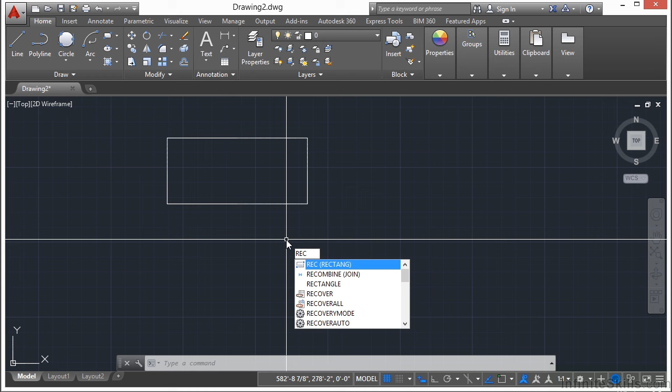You can just pick the command here out of the ribbon, or you can type in rectangle, or just REC, press return. You pick your first point, and then you pick your second point.

Now you can also define the lengths of the line to make it exact. You type it in similarly to drawing a line. So let's say I want it to be 24 inches, tab over, and then we'll make it 12 inches high. And there we go — we have drawn this rectangle at 2 feet wide and 1 foot tall.

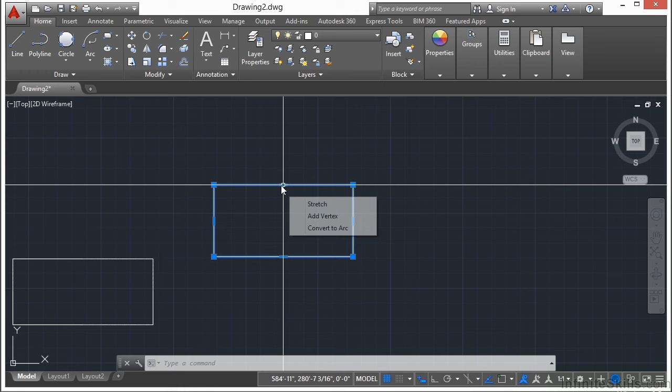And you can see when I select it, my grips tell me that this is also just a regular polyline. Now there are some other options for the rectangle. If you notice here, you have chamfer, elevation, fillet, thickness, and width.

To define the chamfer or fillet, you'll choose either the option C for chamfer or the option F for fillet, then you type in the value. So let's use a chamfer unit of 5 — we're going to type in C, press return, type in 5, and then 5 again because it gives it a bit of an angle.

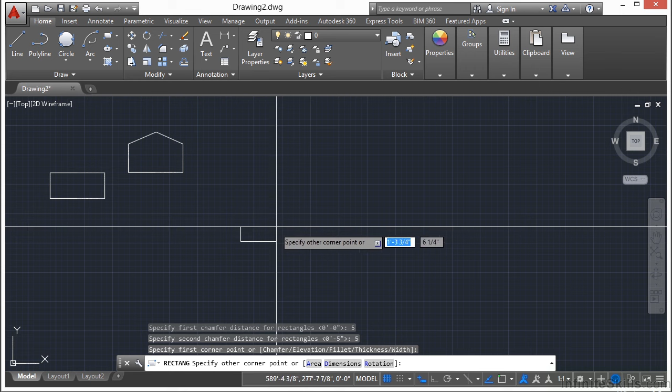So now I pick my first point, and it looks just like a regular rectangle until the box is big enough to have a 5-unit chamfer on the corners. That's a really cool trick.

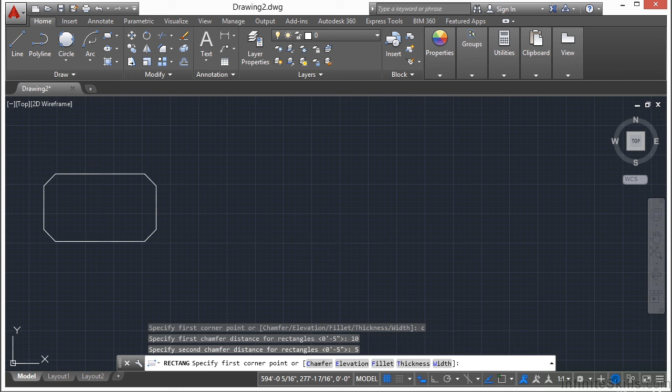So if I do this again and select C for chamfer, let's say I go 10 units and then 5 units on that chamfer. I pick my first point, and you can see I have a chamfer here, but it's a little bit different because one is at 10 units and one is at 5 — it goes down 10 and then 5. Keep in mind that first number you pick will go across and then up, and here it goes down and then across, etc.

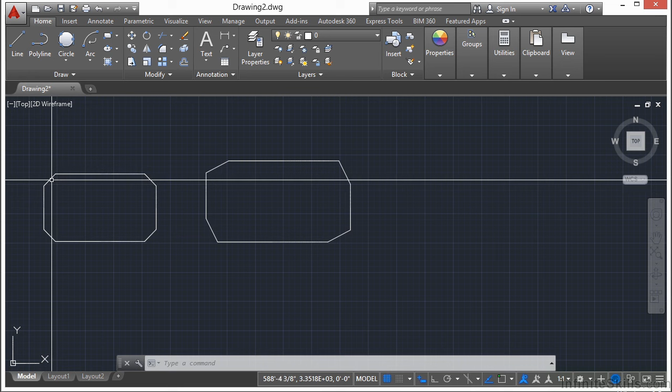Keep that in mind — you're going to get weird shapes, and you typically aren't going to need something like this. It's not going to give you something mirrored or symmetric unless both units are the same. So you're going to get kind of weird stuff, but if that's what you need, it works out perfectly.

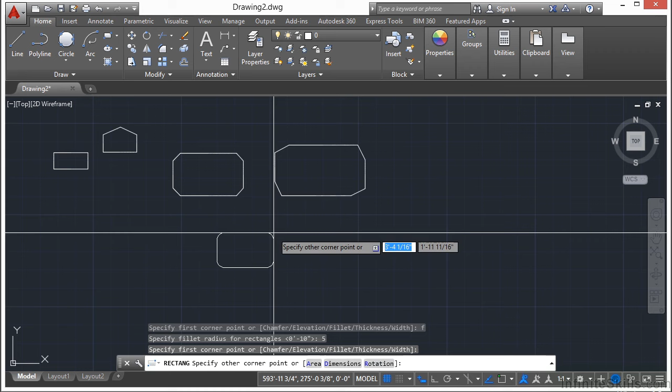Now the fillet option for the rectangle command works almost identically. You start the rectangle command, type in F for fillet, press return, and then you enter in a value. I'm going to enter in 5 again, press return. So instead of the corners being notched, the corners are going to be round, with a radius of 5 units. That's the fillet — very simple, and it makes a nice little shape.

Rectangles are simple polygons, but you can get pretty fancy when drawing with them. So you start the command again and look at the options, and you see there is an elevation option. Well, that's for 3D work or for a thickness.

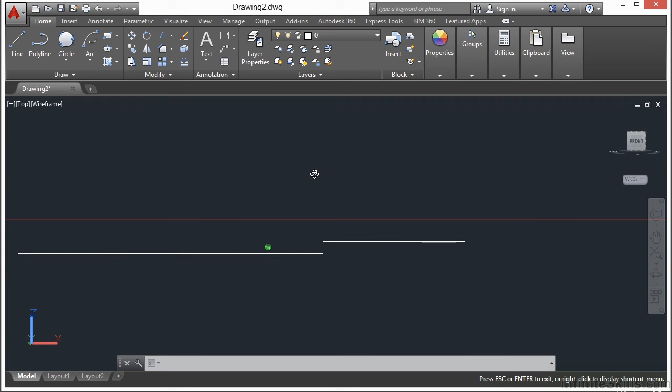So if I type in E for elevation, and I type in a value of 5, and then I draw my rectangle, I zoom in here and it looks exactly the same. Well, it's not — it's at a different elevation, up higher. It's kind of hard to see, but if I rotate my view, you see all of these rectangles are drawn at an elevation of 0, while this one is at an elevation of 5. That's just something else you can do with it automatically.

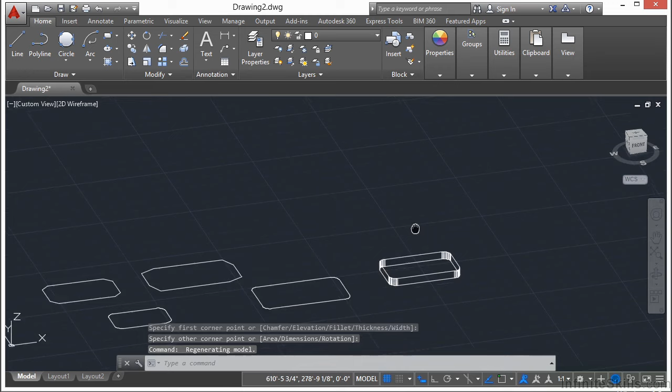Now my thickness option, I'm going to call it 5. And I'm going to draw a rectangle again. In 2D, it looks the same. But when I rotate...

It's 5 units tall or thick. It's also starting still because I made that one change at an elevation of 5. So you have to keep that in mind.

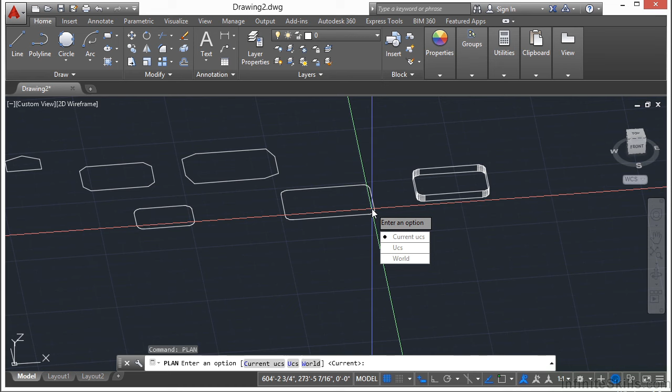Every little change I've made to the setting sticks: I made a fillet for the corners, I changed the elevation to 5, and I changed the thickness to 5. It keeps adding to that. It remembers that, keeping it the way you had set it before. So keep that in mind, it doesn't reset every time you start the rectangle command.

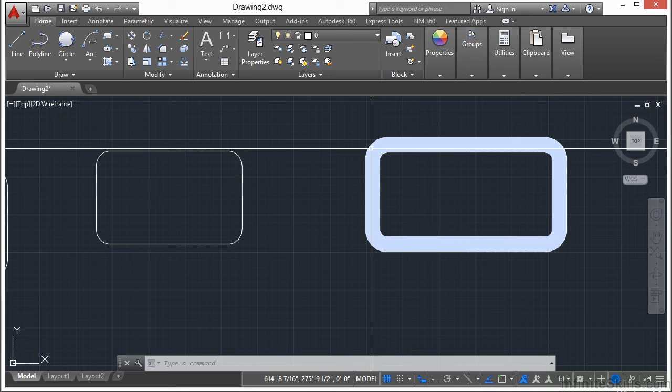And on my last option, the width, type in W. Again, I'm going to use 5 because that number has been working so well for us. And I'm going to draw my rectangle. So now you can see here I have a very thick, fat looking rectangle with my rounded corners. And when I rotate, you can see it's 5 units tall, 5 units wide, and at an elevation of 5 units.

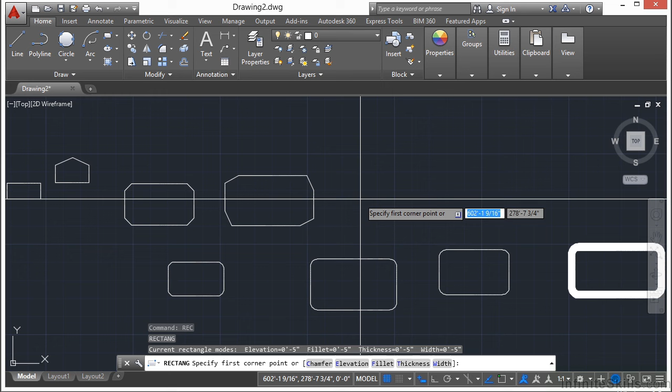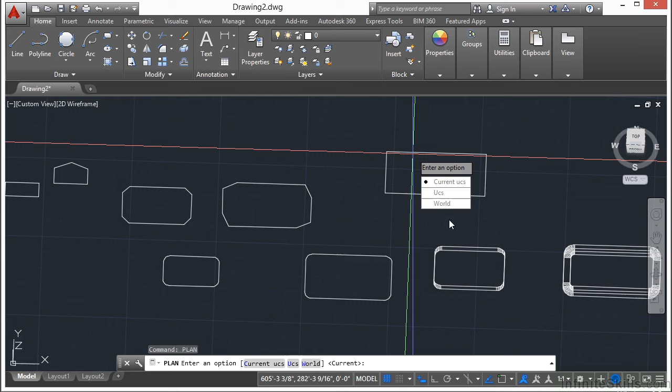So in order to reset all of that, I'm going to have to go through my rectangle command, go through all of my settings: go to my fillet and set that to 0, go to my elevation and set that to 0, go to my thickness and set that to 0, and go to my width and set that to 0. And now I have a regular, plain old, boring rectangle again. So there are a lot of things you can do with a rectangle besides just a regular old rectangle.

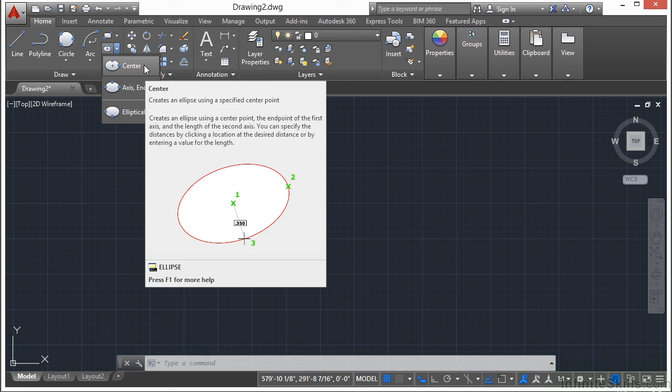Now let's take a look at the ellipse command. An ellipse is essentially an oval, and there are basically three ways to draw them. The command starts and you pick the center point, then you're going to pick two other points. There are two other ways to draw it as well, but we're going to start with the regular ellipse command. You can type in the word ellipse, just type in the letters EL for ellipse, or you can go up to the ribbon and start the command.

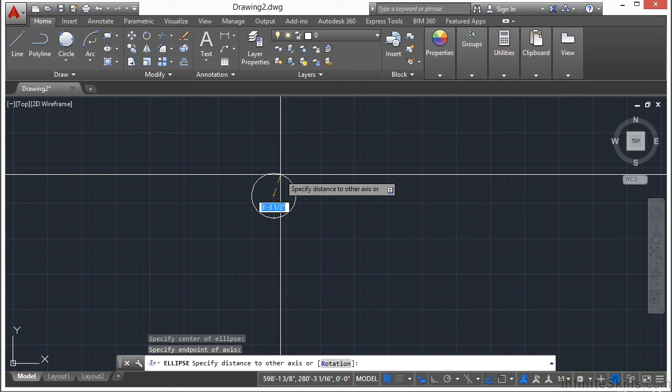First of all, it asks you for a center point, and then for a width point. Think of this as being a horizontal line. That shows you how wide it's going to be. And now you have to define the height. As you can see, as I stretch it, it goes from a circular looking object to a more oblong, traditional oval. And that's it, it's very simple to draw.

Now, if I turn on my ortho command, press the F8 key, or if I click down here, I can draw a very simple, perfect looking oval. That's great, you can use this a lot if you're making piping drawings in a profile view with an exaggerated Y-axis. In civil design, you do this often, so I get to do this quite a bit, drawing pipe cross sections like this all the time. So that's one practical use of an ellipse.

Let's look at the axis and endpoints. So I specify my axis endpoints, that's my width. It skips the circle part. So I'm essentially picking on one side and then picking on the other side, that's how wide my ellipse is going to be. And then I go to the height. Very simple. And then my other option here is the elliptical arc.

Essentially, I'm drawing an ellipse, but I'm only going to draw an arc. So I pick my center point, my width point, defining how the ellipse is going to look. I'm going to turn off my ortho command for this part. Now I pick my start point, and now I'm drawing the arc length. So that's how you get an ellipse like that.

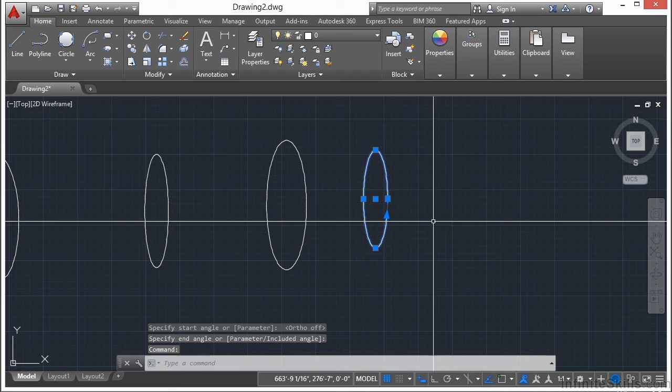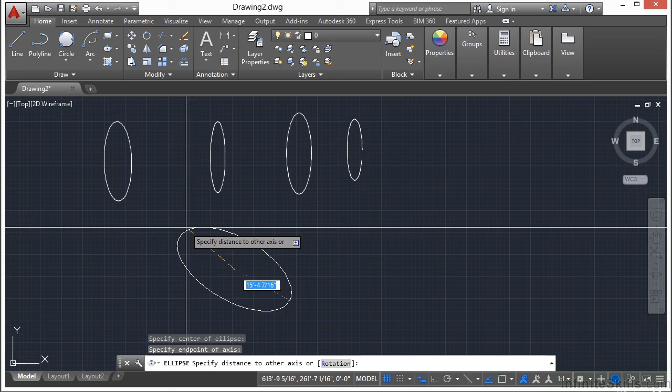Now the ellipse, keep in mind, if your ortho command is turned off, like I have mine off right now, when I pick my center point and then my width point, it's going to be drawn at this angle, not perfectly horizontal or vertical. So it can be oblong like that. There are a lot of different ways to draw it, and it depends on exactly what you're trying to draw, the perspective of it, or what information you have at the time.